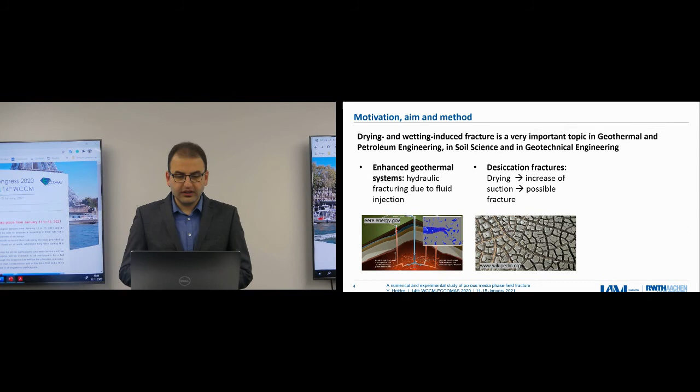Another example from soil science is the drying of soil, in this case maybe clay or clay soils. This leads to fancy patterns of cracking networks, and this is a very important topic. The third topic would be slope stability.

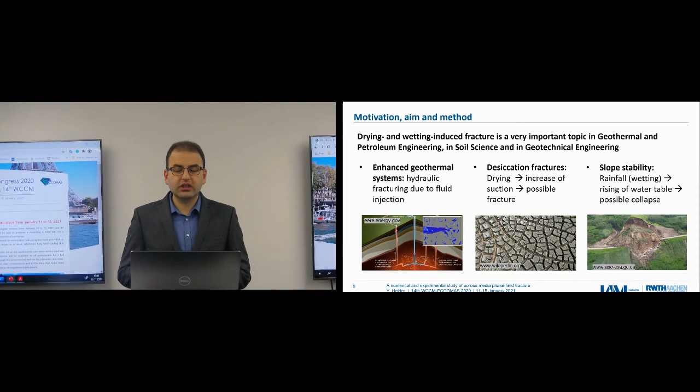Due to rainfall or drying, there are changes in the water table, and this leads to changes in the hydromechanical properties of soil layers, which might lead to collapse and a kind of fracturing. So this is also an important topic to be addressed.

So the aim of this presentation is to understand and predict the onset of porous media fracture. This can be done using numerical models, and we would like to calibrate and validate this model by comparison with experimental data, either from the literature or our own data.

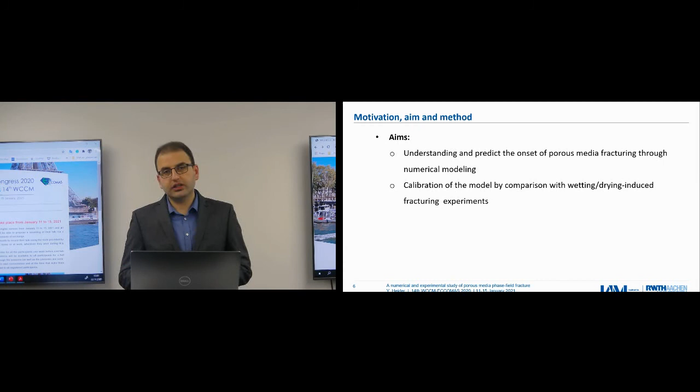The method we are following is applying continuum mechanical modeling of this multi-phase material, and we apply the phase field method for fracture modeling. At the end of this presentation, I will talk a little about future aspects and possible extension towards inclusion of machine learning-based material models.

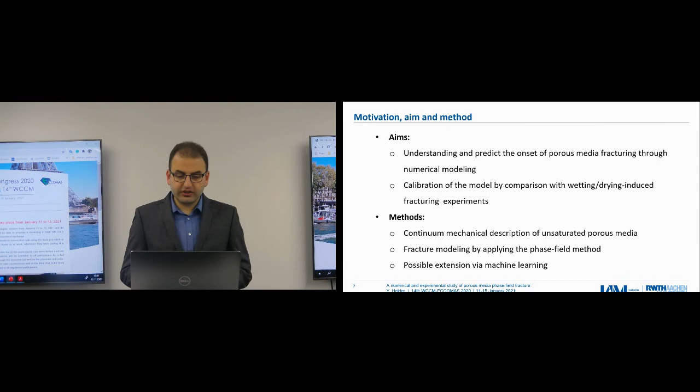After this short introduction, I will talk briefly about the phase field modeling approach and the continuum modeling of unsaturated porous media. Then there will be two examples, one related to drying-induced fracture and one related to hydraulic fracturing, and at the end are the future works.

So very roughly, the phase field modeling of fracture is based on the idea of approximating the sharp cracks of brittle materials. Brittle materials will break in a very sharp crack interface. This can be approximated by a diffusive one. In this case, the crack surface, which is no longer like a line or surface integration, but would be like volume integration.

This can be done relying on the function gamma, which is called the crack density function. For this, we need a phenomenological phase field variable, which we call D. It's a scalar value, and it has a value of 1 if we have a crack, 0 if we have intact material, and it will be between 0 and 1 in the interface.

This approach allows us to approximate the diffuse fracture energy and write it in this form. In this case, GC would be Griffith's critical fracture energy, multiplied by our function gamma. In this formulation, you see we have a new material or model parameter called LC, which is an internal length scale. This parameter controls the width of the diffusive interface.

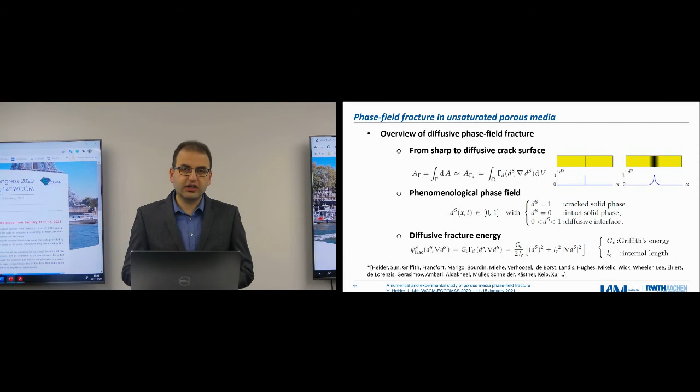Now for porous media, which is unsaturated, the continuum approach starts in a kind of standard way. First we choose a representative volume element, and this consists of 3 phases: the solid phase, the liquid or water phase, and the air phase. So 3 phases, then we apply homogenization.

In the homogenized material, we have at each material point 3 phases: the gas, the liquid, and the solid, and they are overlapping and interacting.

From this, we define also the volume fractions, n, and the sum of volume fractions of the three phases equal to 1. This is a restriction, and this has always to be valid in the modeling.

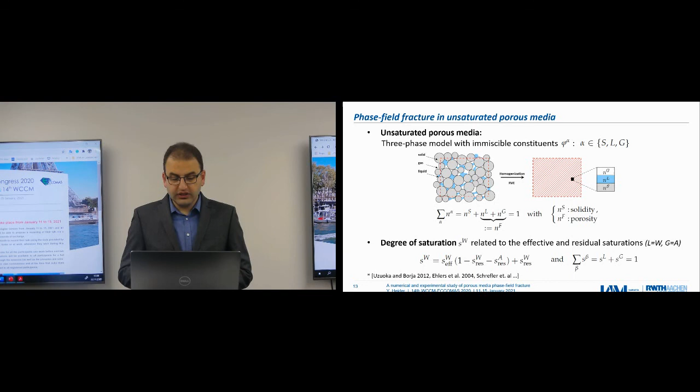As we are talking about unsaturated porous media, we have additionally the degree of saturation, given in terms of the effective value and the residual saturations. In reality, you cannot get completely dried or completely saturated material. There should be some residual, either gas or water.

So based on this, we define this relationship. A constitutive model related to unsaturated porous media is the retention curve, which is a relationship between the degree of saturation and the suction, or the capillary pressure PC, which is gas pressure minus liquid pressure. There are many models in the literature to describe this retention behavior, and we choose one of the popular models.

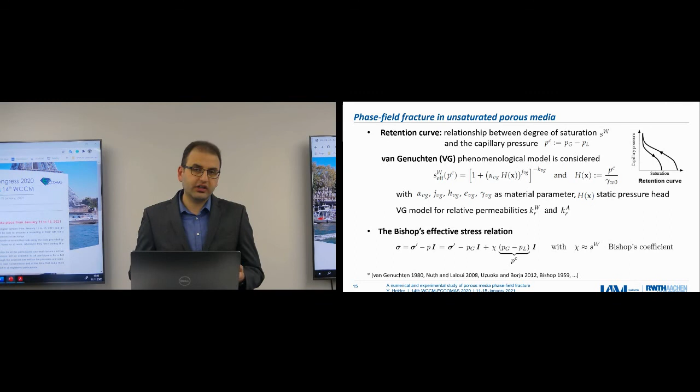Now we come to the phase field fracture, and its inclusion in the porous media approach. The basic idea is that when we have a crack, then we have degradation in the stiffness. That's why we start by defining the degradation function, G of D.

It's mainly a function of the phase field variable D. And we include additionally a parameter eta, which is like a residual stiffness. It's needed only for some numerical stability issues. But if we want to consider completely broken material, then this eta should be 0.

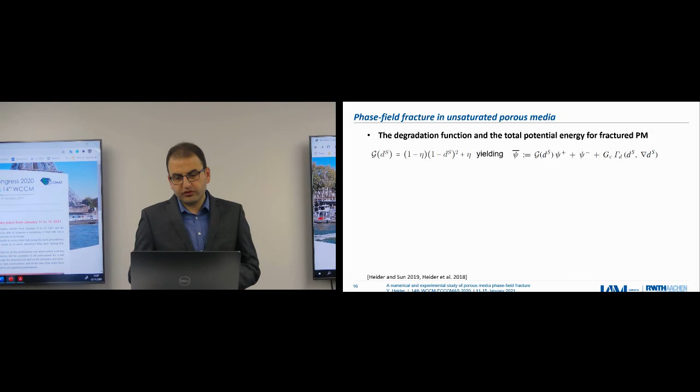So we multiply this degradation function by what we call the positive energy. The positive energy would include the tensile stresses and the shear stresses. In addition, in unsaturated porous media, we will have the additional contribution due to the suction, so this also has to be degraded. The total energy would also include the fracture energy, as we discussed before.

Based on this, we can derive our stress tensor. So the stress would simply be the derivation of the energy with respect to the strain. And then we get this first relationship of the stress, which is in connection with the drying induced fracturing.

You see that the degradation function is multiplied by the elastic energy, which is the positive one, and also includes the contribution of the suction, PG minus PL. It means that when we have a crack, as in the illustrated figure, the liquid bridges will also be broken, and then we'll have no suction anymore. So this also has to be degraded.

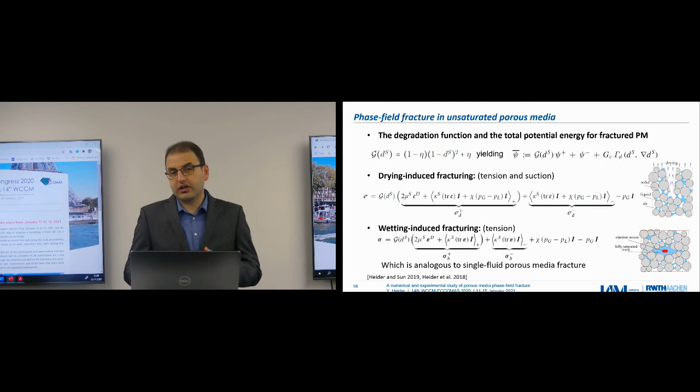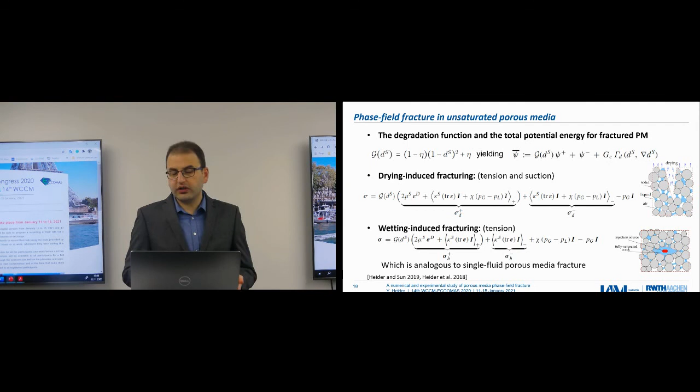If we have wetting or hydraulic fracturing due to the injection of fluid in a certain domain, then the suction does not really play a very important role. In this case, the degradation function will be multiplied by the elastic energy contribution to the stress, which is a positive value, as I said, the tensile and the shear stress. This is for hydraulic fracturing, and it's exactly the same relationship if we consider one phase fluid. So unsaturated would be 2-phase, and fully saturated would be single-phase fluid.

The fracturing in porous media, if we have a fluid flowing, leads to changes in the hydraulic properties of our material. That's why it's important to address the issue of permeability change due to the crack. Previously, when there is no crack, the permeability of the material is almost isotropic, having the same value in all directions. But when we have a crack opening, the flow in the crack direction will be enhanced.

So we have a kind of anisotropic permeability, and this can be expressed in a relationship which is a function of WH, the crack width. This can also be determined based on the gradient of the phase field variable and also based on the local deformation of the material. So with this, we include in our model both the isotropic and the anisotropic permeability.

There are a number of additional extensions, like the residual saturation being different in the crack. In the cracks there will be almost no residual saturation, and this can also be considered in the model.

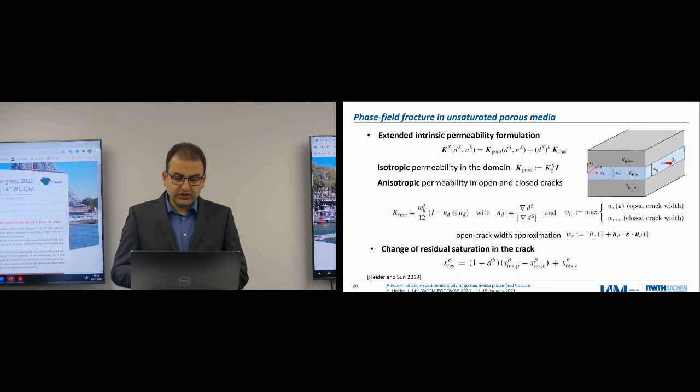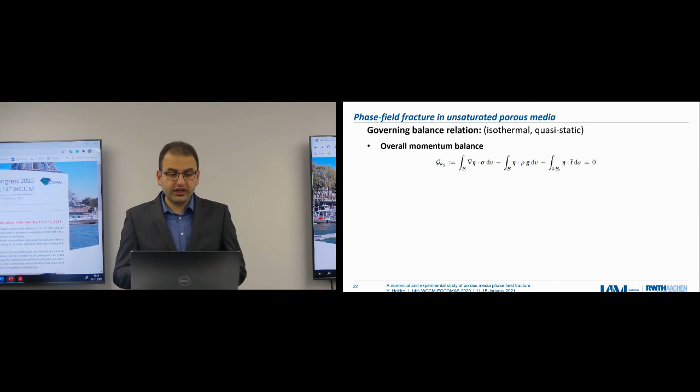At the end of the day, we will have a number of partial differential equations which govern the behavior of our material. In particular, if we consider isothermal states, we have four equations, which are the overall momentum balance, the liquid mass balance, the gas mass balance, and the phase field evolution equation.

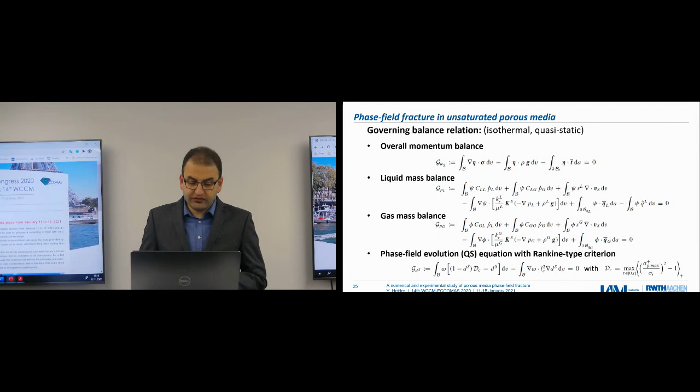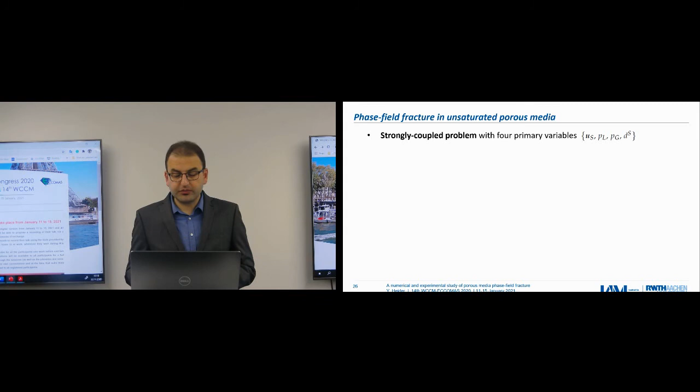In this case, in the numerical simulation, we have to deal with a strongly coupled problem with four primary variables, which are the solid displacement, the liquid pressure, the gas pressure, and the phase field variable.

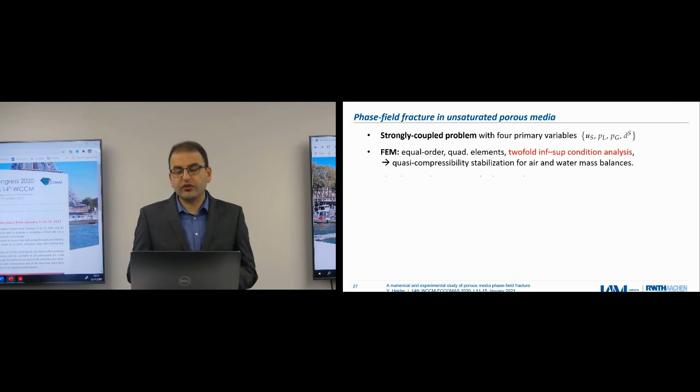If we are dealing with finite element methods, this problem, especially in the porous media problem, represents a twofold inf-sup condition that must be fulfilled. If we use equal order shape functions, we have to use a stabilizing term, especially if the permeability tends to be very low, or the fluid becomes almost incompressible, so we have to take care of the instability sources.

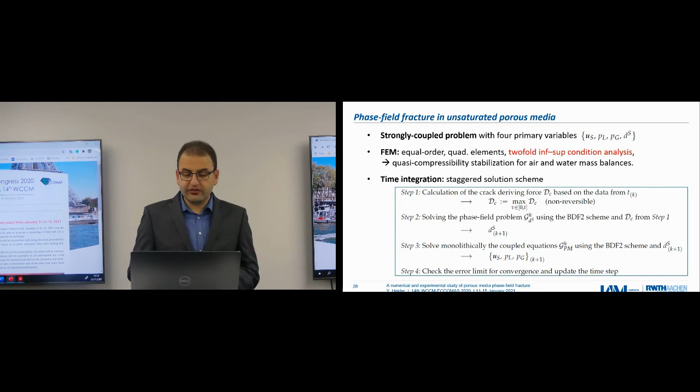In our treatment, we applied a staggered solution scheme, in which we started by computing the crack driving force, then solved the phase field equation in an implicit way using the second order backward difference formula. Then once we get the phase field variable, we solve the unsaturated porous media problem in a kind of monolithic way. At the end, we check the convergence and make sure our errors are within the limits assigned at the beginning of the analysis.

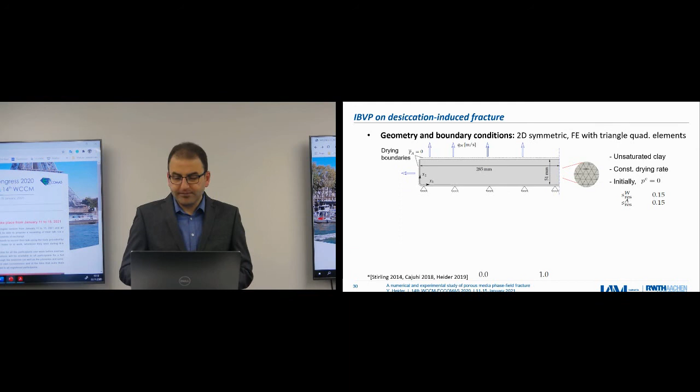Let's present one of the examples, the drying induced fracture. We have this domain, an unsaturated clay, and we apply the drying process on it. Here, as I said, we have no temperature, so the drying would be a kind of outflux at the boundary, represented by the flux vector QW. Initially we have no capillary pressure, and the residual saturation is 15%.

When the drying process starts, we see that the cracking starts to propagate at the beginning from the bottom, and then from the top, and then we get different cracks propagating at different speeds and so on.

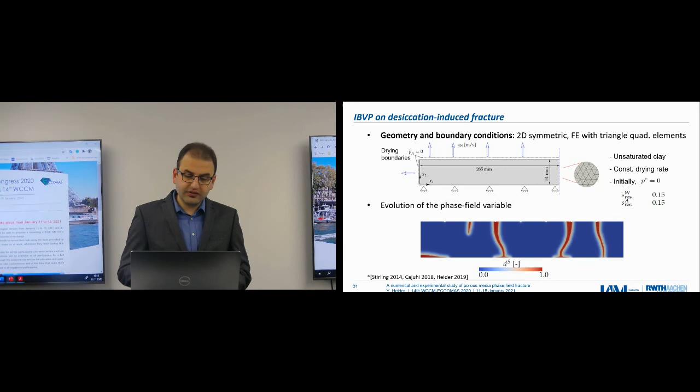In the analysis, we tested a number of issues: material parameters, different boundary conditions, model parameters, and how all these affect the cracking patterns. For instance, permeability is a very important factor. Once we go towards very high permeability, we will not have a lot of cracks, or maybe no cracks at all. If we have very low permeability, just like clay, we'll have more cracks, as you see here in this picture with a lot of cracks.

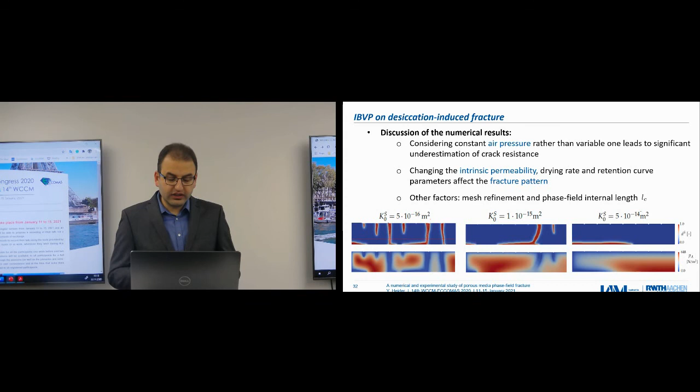Our choice is glycerol, a highly viscous fluid, and the reason for this choice was that this highly viscous fluid leads to a kind of stable crack propagating process. This fluid was also mixed with some colors in order to determine the radius of our crack.

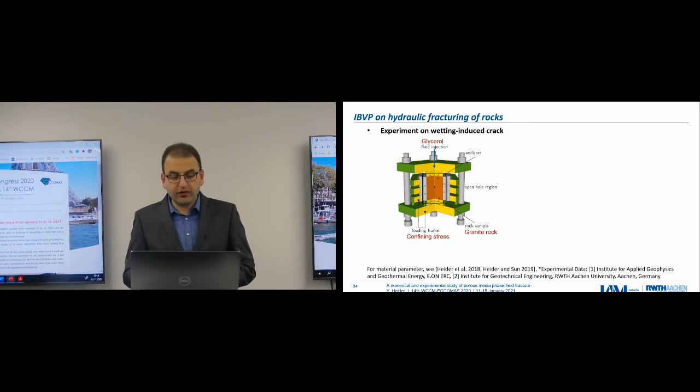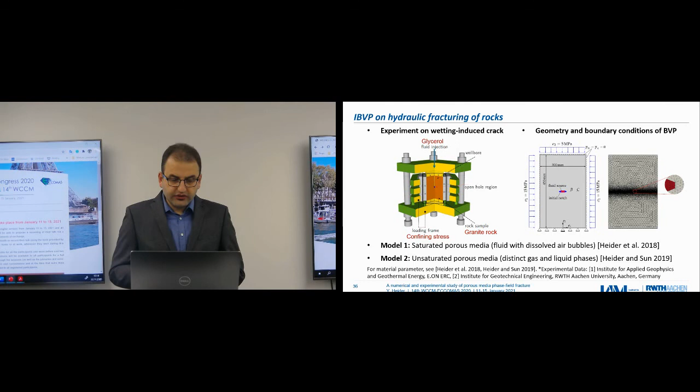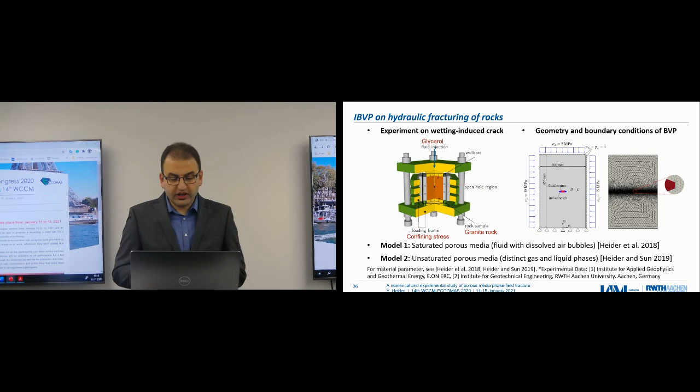So we have two models. The first is fully saturated porous media, but the fluid is compressible as we have dissolved air bubbles. The second is unsaturated porous media, where we have gas and liquid phases.

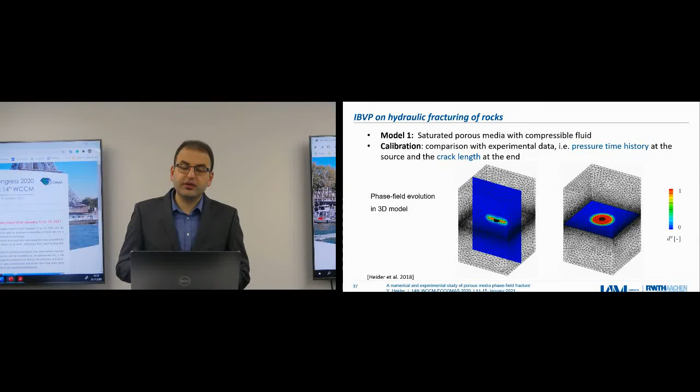This is an illustration of how the crack propagation looks in our 3D model. Our first impression is that qualitatively we are getting very comparable results with our experiment. This is a first comparison with the experiment.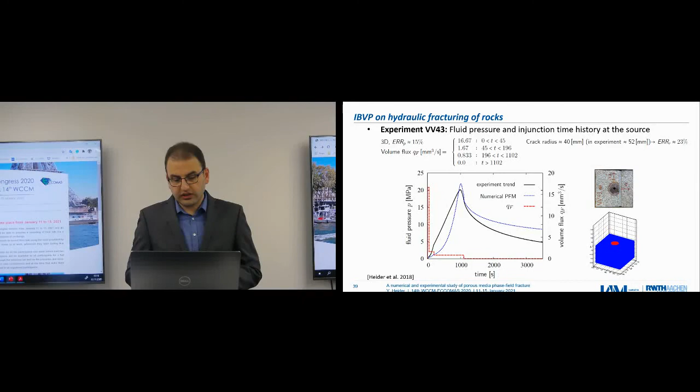We tested a number of cases. This is another case with a different volume flux, and we are again getting comparable results. This shows that our model is actually capable of modeling this process, although it's very complicated.

The second example assumes our material is unsaturated, with initial saturation of 40% in the domain and 99% in the notch. After the crack forms, we see negative air pressure inside the crack, which is what we actually expect, because we have suction towards the crack, and this is what can be observed in reality.

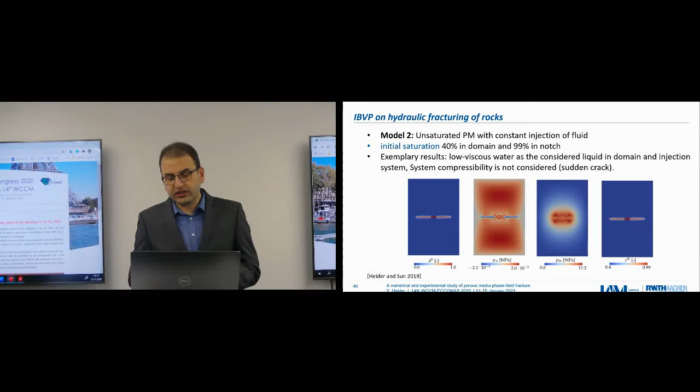The fluid pressure around the crack is higher than inside the crack. This was an interesting finding. And of course, the degree of saturation inside the crack would be almost 100%. This is logical.

We have a number of future work aspects, and I will address one of them here: improving the accuracy of our model.

What we are doing here is using machine learning approaches to generate material models. We have a number of material models in unsaturated porous media. One important one is the retention curve, and this can be generated using multi-scale modeling.

The first step is to generate a database for our machine learning model. We use the discrete element method for the deformation of our porous material, and the Lattice-Boltzmann method to generate the permeability and the retention curve.

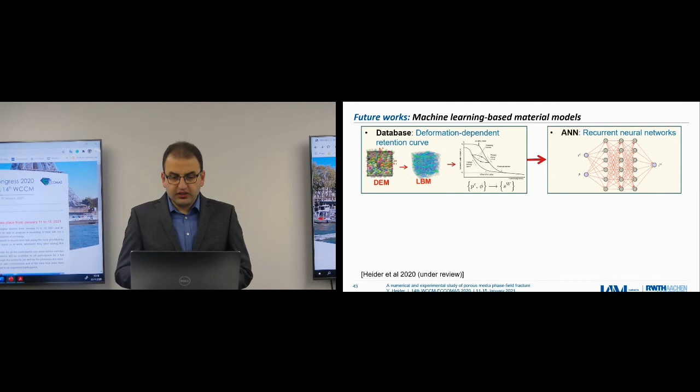So we get a relationship, or a database, which includes the suction, the porosity, and the degree of saturation. We take this database and put it into our machine learning algorithm.

The retention curve is path dependent. We distinguish between drying and wetting processes. So we use a recurrent neural network to generate our model, and then we can test whether it really captures this behavior.

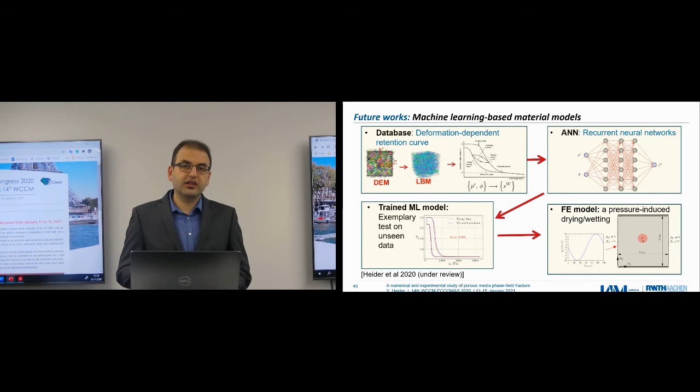We test this on unseen data, which is not part of the training. If it shows very good performance, we implement this in our finite element model as a replacement for the conventional, phenomenological retention curve model.